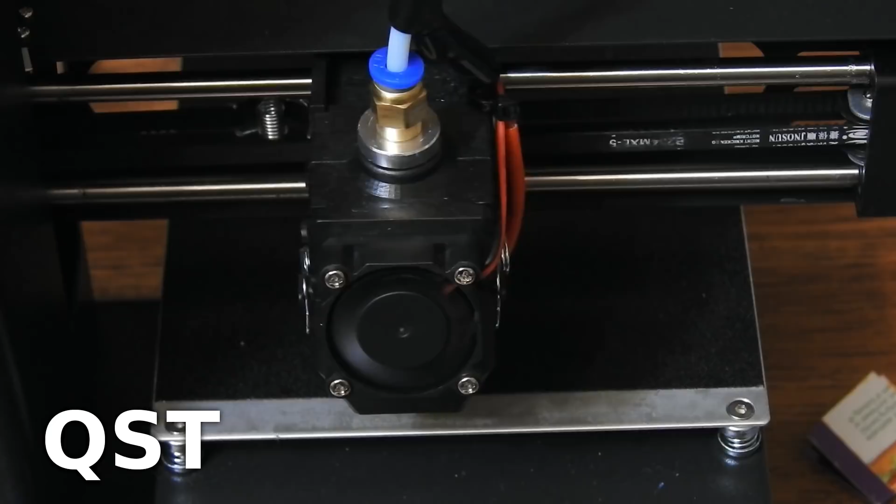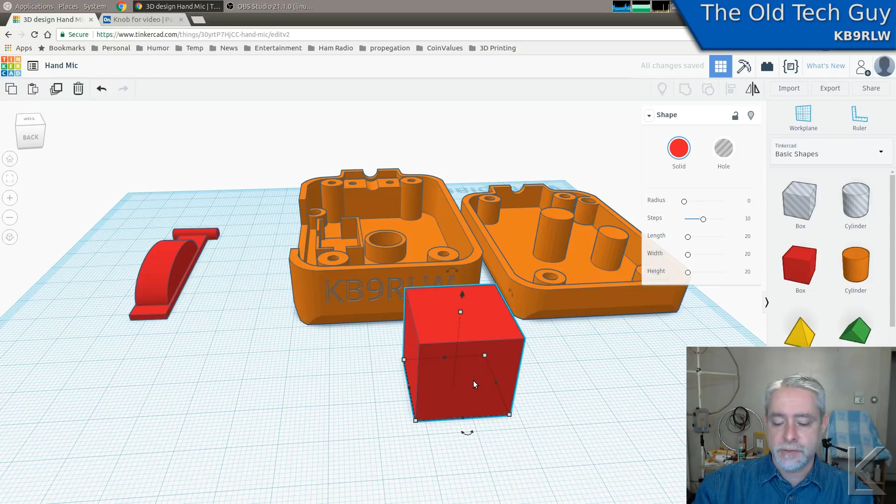Way back in part 2 of my 3D printing for ham radio video, I introduced you to Tinkercad as a design program. Tinkercad is one of the simplest 3D design programs I've ever seen if you're getting into 3D printing. It's primitives based, meaning you can build complex objects, like my hand mic here, out of primitive shapes—cubes, spheres, cylinders, and so on. Very much like Legos, and therefore very easy to use, easy to grasp and understand, and still pretty powerful. As you saw from my hand mic, you can make fairly complicated things with it.

I wanted to move up the ladder into more complicated and more powerful design programs, and make that the next part in the series. Well, that's what we're doing today.

Today we're going to look at a 3D design program called OnShape, at OnShape.com, or CAD.OnShape.com. OnShape is a collaborative computer-aided design program, modern, created to allow people to use it from any web browser, from tablets, cell phones, any device really. It's very powerful—it's getting on par with programs like AutoCAD in that it can make extremely complicated parts.

You can assemble parts together, have them interact with each other. You could, on the screen in your CAD program, model a clamp with a screw and a handle and set up rules so that you turn the screw and it behaves like it would in real life, so you can show assemblies. It's a very, very powerful program, yet still simple enough to be approachable and easy to understand.

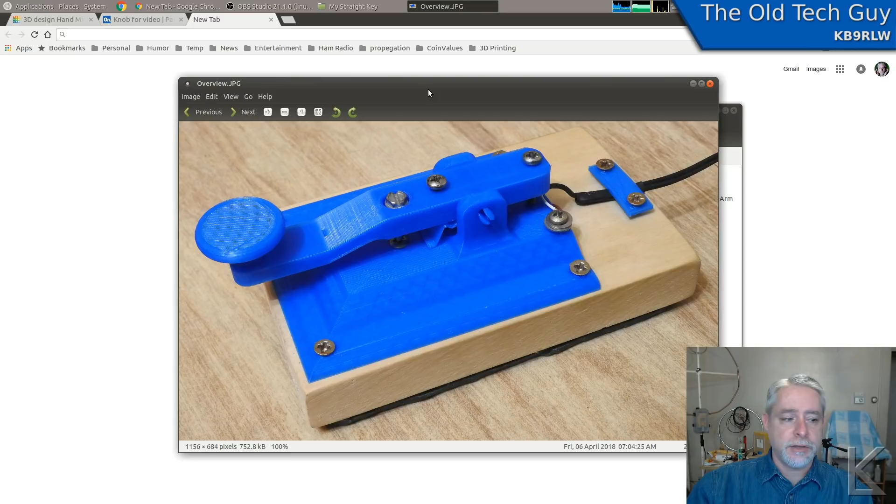For example, I'll show you a picture. Let me switch around here. Let's see—ham radio key parts, my straight key. I just finished this in OnShape, which is a straight key, obviously, designed for minimal hardware.

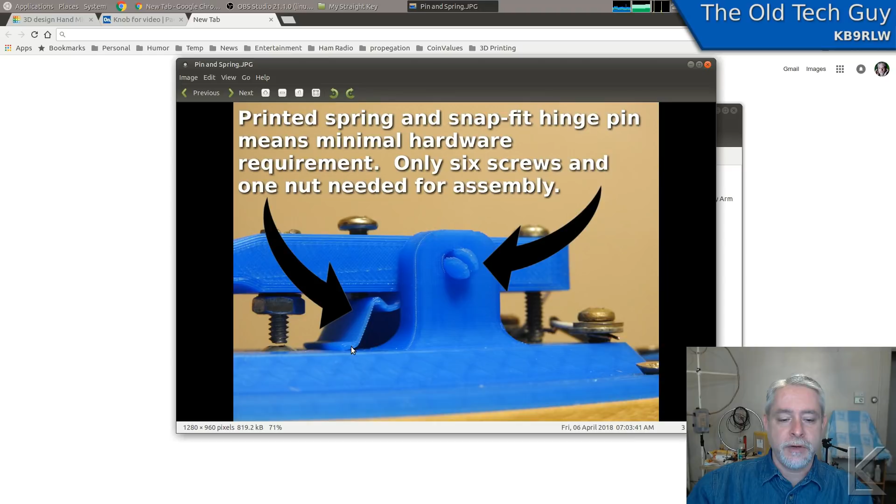I have a 3D printed spring here that's adjustable from a screw up top that'll compress this part of it and increase the tension. Snap fit hinge pin. The knob is also snap fit, and you can see the base has a nice design to it.

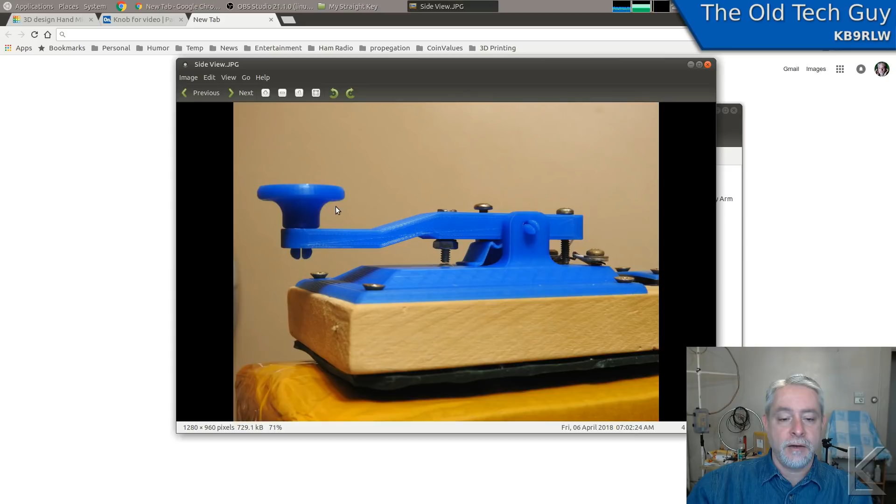We've got nice curved fillets here and curved edges. These are the things that are kind of hard to do in Tinkercad, like this curve on the underside of the knob here—that's hard to do in Tinkercad. It would take a lot of steps and a lot of extra parts.

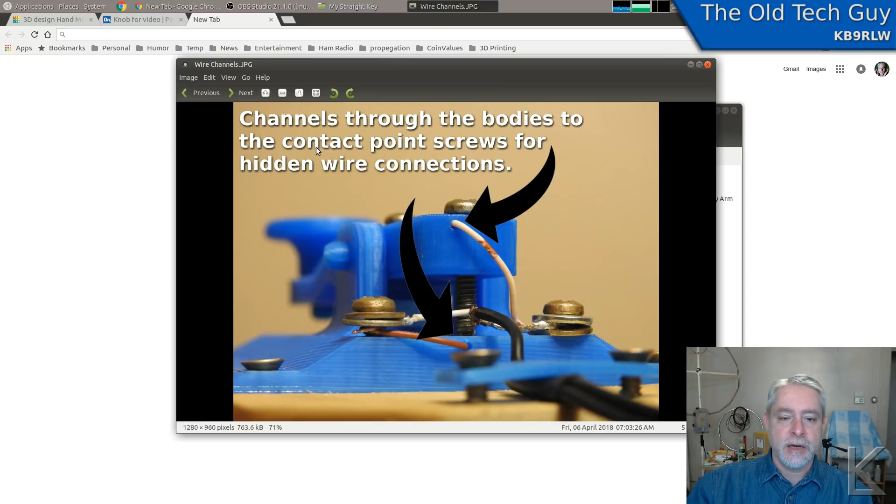I even did a few fancy things, like there's little channels here that the wires travel through the base and through the arm to the contact points, allowing the wires to be hidden when you're looking at the overall straight key. See, those wires are running right through here to this screw and to this screw down here, so it's nice and clean looking on the surface.

So you can do pretty complicated things in OnShape. But as I said, the program itself is a little more complicated to use. So today I'm going to show you OnShape, and we're just going to touch on some of its capabilities. To do so, I'm going to make a simple part—this knob off of a J38 style telegraph key.

Now take a look at this knob, okay? Look at it in profile—you can see sort of the outline shape of it, almost a T shape except for that slope under there. That's important. You could look at this object from the top and you see a circle. You could look at it from the side and you see kind of this T shape to it, right?

The reason that's important is that OnShape is based on sketches. Like most higher-end CAD programs, you create a two-dimensional flat sketch of a shape, and then you expand or extrude it into 3 dimensions, and then you apply operations to it to cut things into it, put holes through it, extend parts out of it, smooth it, twist it, loft it, do all kinds of things. So you always start with a two-dimensional sketch, like you would on paper, right?

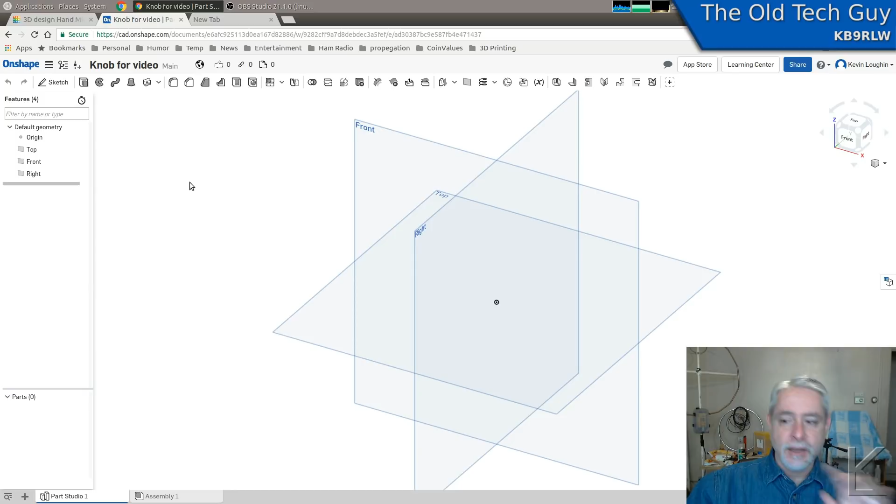So let's go back into the program here. This is the main user interface to OnShape. By default, you have 3 planes defined here. You can see these—there's a front plane, there's a right plane or side plane, and then there's a top plane when you're looking down from the top. So the 3 dimensions are represented, and you start your design by drawing a sketch on one of those dimensions.

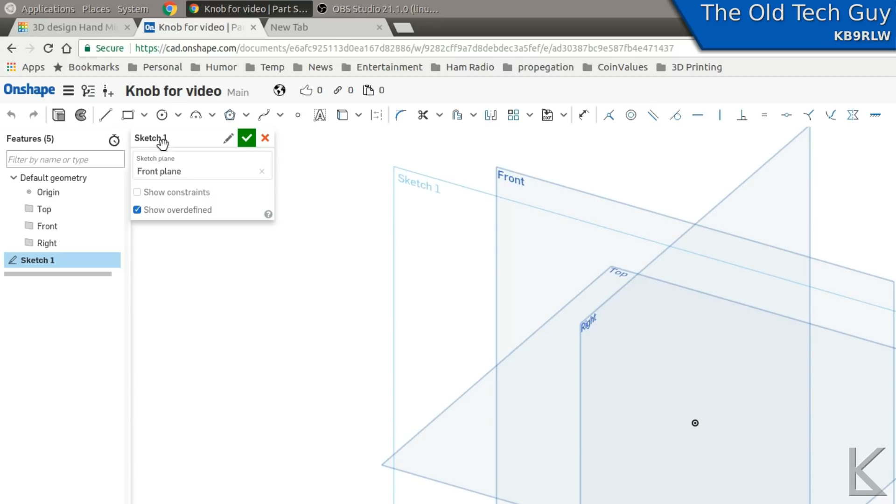So I'm going to draw an outline of that knob on the front plane. I'll select the front plane, and I'll go up here to Sketch in the upper left, and it creates a new sketch. Now you see this little window that popped up here—every tool that you select will have a little window that shows you the options for that tool. So I've just created a new sketch on the front plane, it says right here, front plane.

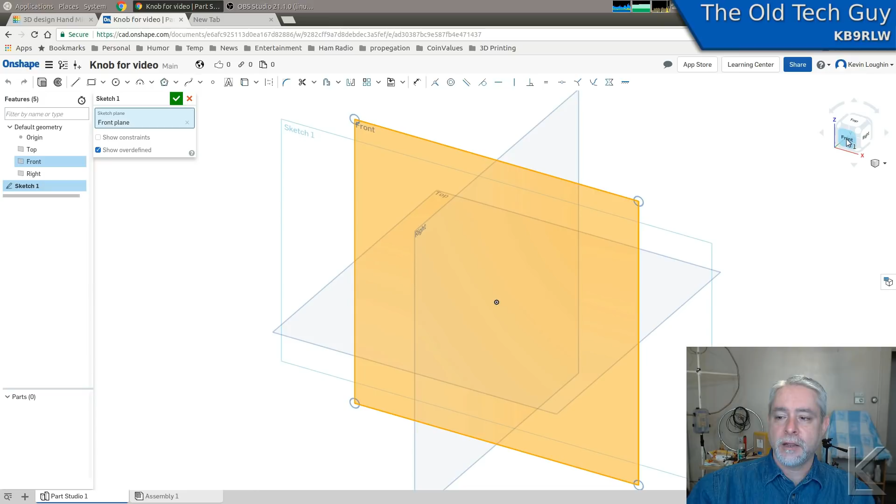And we're ready to start drawing on this plane. I can come over here. This little cube shows you your views, and I can click on front, and it'll switch to a front view looking right down at the front plane. I'll use the mouse wheel to zoom in, and the mouse button to position my display. If I use the right mouse button, that would rotate, but I don't want to rotate right now. I'm sitting on the front plane where I want to be, so I'm ready to start drawing the profile of my knob.

Now, this knob is symmetrical, right? It's the same on this side as it is on this side. We've got perfect symmetry there.

So a real neat shortcut for drawing this knob: I could draw the shape completely, the T, except that all I could do with that is extrude it out in 3 dimensions, and I would have square faces, right? It'd be like a block knob, like a Minecraft knob, instead of this nice round shape. Well, it's a round shape.

So what I'm going to do is draw half of the profile only. And then I'm going to take that half and rotate it around the center to make the solid shape. So I'm going to draw the profile of my knob.

We're going to do that with the line tool up here in the upper left. I'll select a line, and I'm going to start from this center, because that makes it easier to line things up. This center dot here lights up when I cross the center line, and you see a little vertical line next to my pointer. That's telling me I am on the center of that line. OnShape knows when you want to do things like in the center of a shape, and it'll light things up and snap to the center of things.

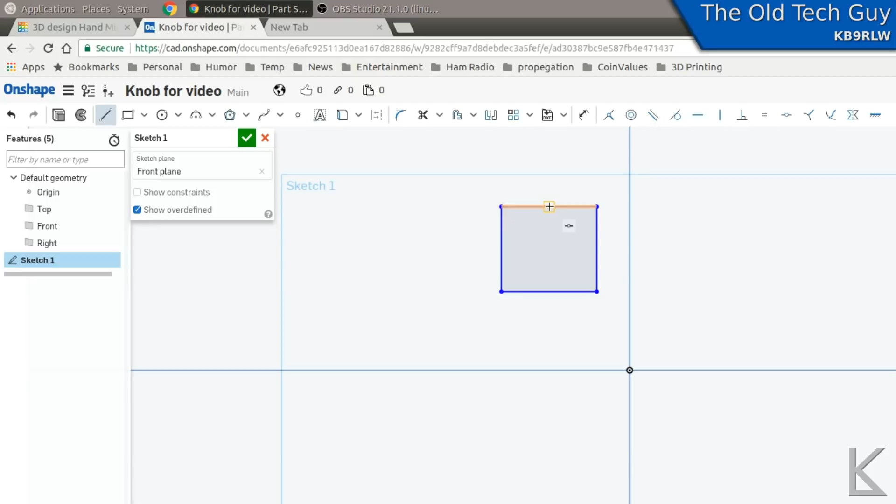That's very handy. For example, we'll do something like a rectangle or square here. If I wanted to draw a line down the center of that square with the line tool, I could guess at it, but as I move the pointer right to the center, a little box appears around it and a little constraint dot icon, a line with a dot in the middle, indicating that I am on the center of that line. OnShape knows that I probably want to work from the center of that point and automatically highlighted it to tell me I was on the center of that object. So that's a very handy thing.

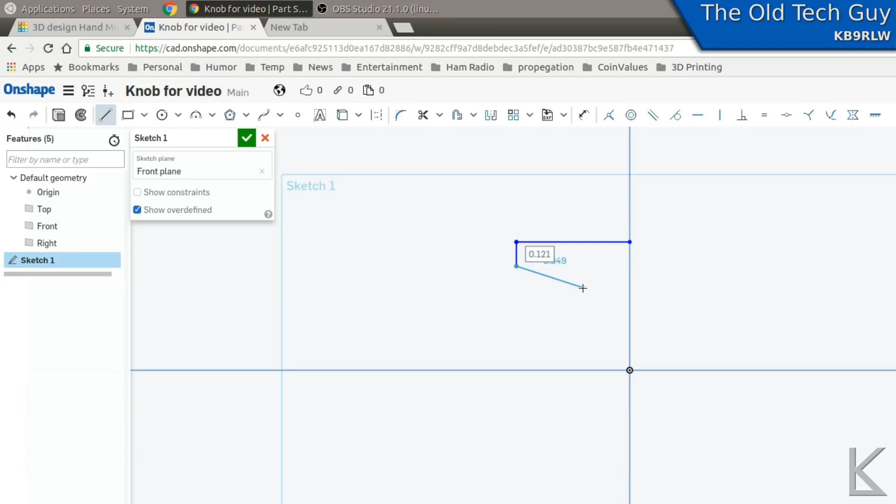Okay, let me get rid of this entity here. All right, so for our knob, I'm going to draw half of the profile of the knob, and it's a rough shape. It's about like so, like so, like so, like that, and back to here. Okay, so that is the profile.

Now I need to connect it. I need to close it up. So I'm going to draw one more line vertically up to this dot. Boom. Okay, now we've drawn roughly the outline of our knob.

Now I'm going to refine that a little bit. We're going to add some dimensions to it. Now I know that this knob is 29 millimeters across the top.

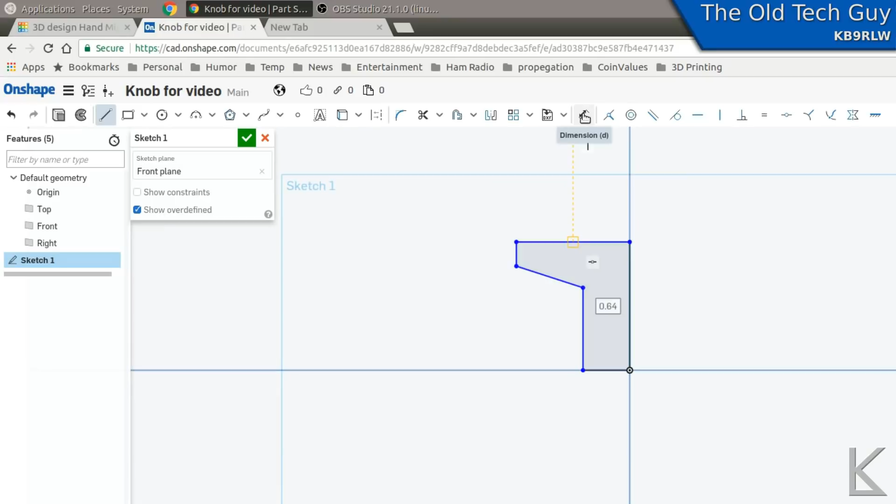So I want this line here to be half of that. I'm going to come up here, there's tools across the top, and the tool I'm interested in is this one, with two little arrows pointing between lines. When you hover over things it tells you what they are—this is the dimension tool. If I wait, it gives me a description of what that tool does and how to use it: select the entity to dimension, or entities to dimension between, then specify the value, and use enter to apply the value.

So I'll select the tool, I'll select this top line, and there's my dimension. Then I can type in what I want it to be. What did I say? Okay, 29 is the total, so half of that is 14.5, right?

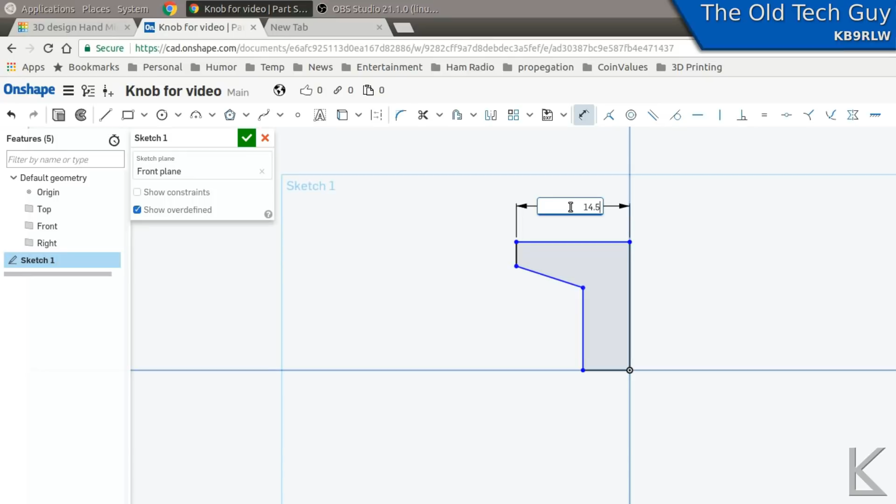Now I've got to zoom out. Oh, you know what, that's working in inches. I want to work in millimeters. OnShape is an American company, so they default to inches, which annoys me. I wish I could just set my default to be millimeters.

All right, workspace units, up under this menu with the 3 lines. Workspace units, and set default units to millimeters. Okay.

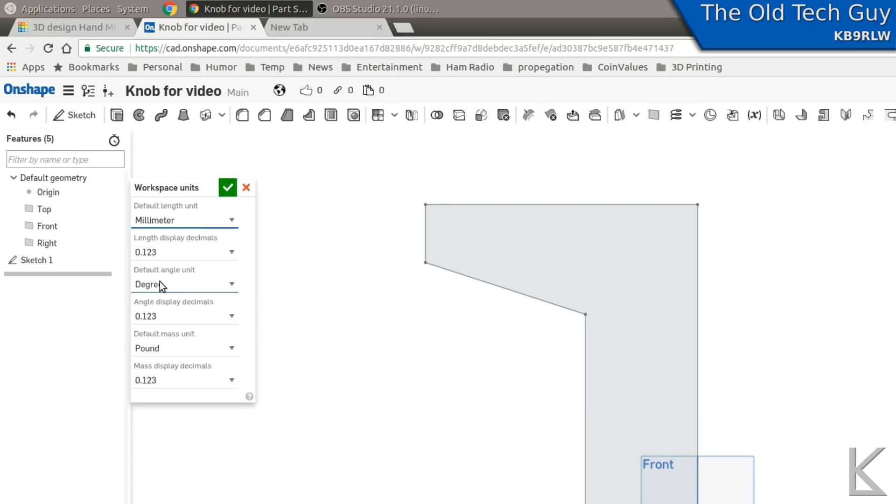Now, if I select that line... oh, I've got to go back into my sketch. I exited out of my sketch.

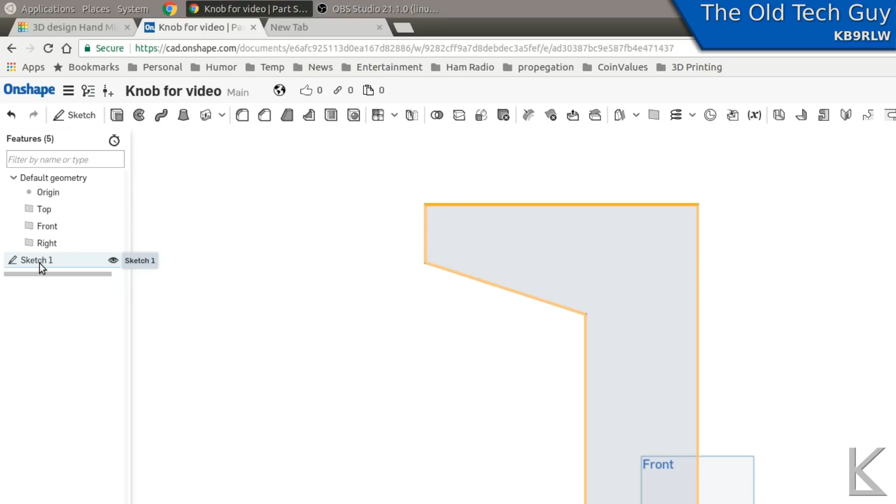While we're here, let's talk about this. Over here on the left is your features list. It shows all of the entities in your drawing. So my sketch shows up here as Sketch 1, I didn't name it yet. If I double click that, I go back into sketch mode. It shows here in this little box that I'm editing my sketch. And here's my sketch with its dimension.

368.3 millimeters. No, we want that to be 14.5 millimeters. Boom, that's more reasonable. Let's zoom back in.

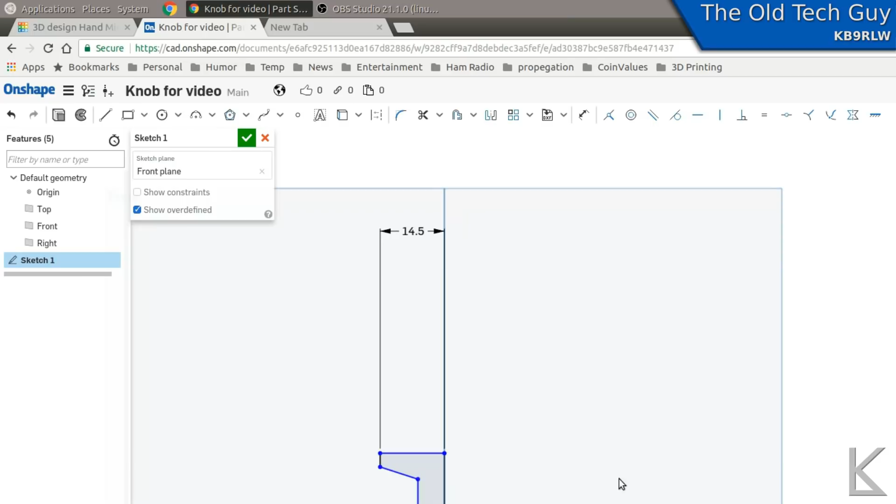Put that dimension down here closer so we can see it. Okay, now what's the next dimension on our knob?

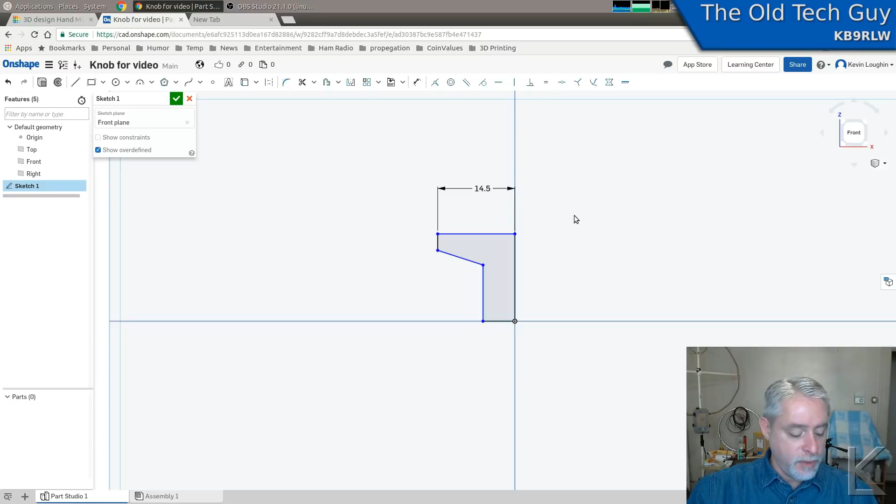Well, how thick is it at the top here? So I get my calipers out, and I'm going to measure that at the edge, and it is 2.5 millimeters thick. So I'll take the dimension tool, I'll pick this line, and we'll set it to be 2.5 millimeters.

Okay, now the tricky part. We've got a slope that slopes down about halfway down, and the bottom of the knob from the bottom of that slope is 8 millimeters. So I guess the easy thing to do would be to dimension this line here at 8.

And that slope adjusted itself. And now the bottom of the knob, I've already measured it, is a total of 13 millimeters. So I want to dimension this line at half of that, which would be 6.5.

And there is the dimensions of our knob. Now, in CAD, you're supposed to fully constrain sketches, which means you're supposed to lock down all the dimensions so that it can't be manipulated any further.

Lines that are already locked in have turned black. Like this line here, I can't change the length of this line without affecting some other aspect of the sketch that I've already defined. So it is locked at 8 millimeters, and this is locked at 2.5.

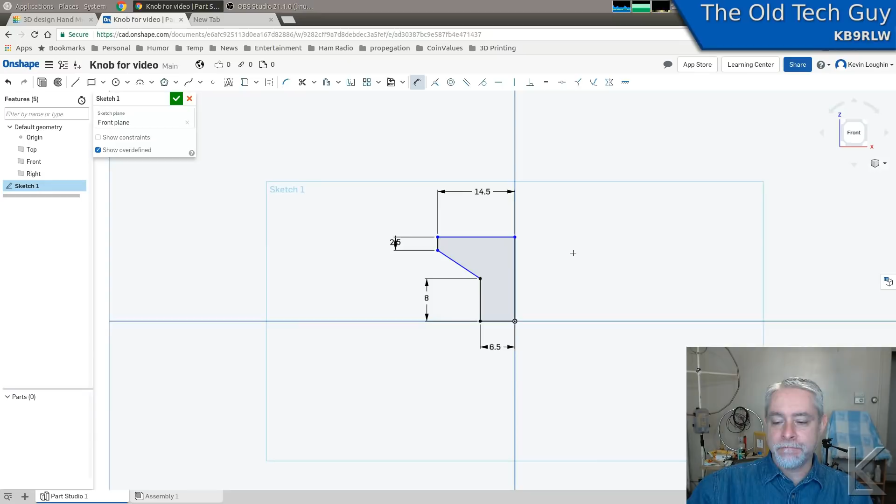So that would be 8 plus whatever this is, plus 2.5. The measurement tool - if I select, let me turn off dimensions.

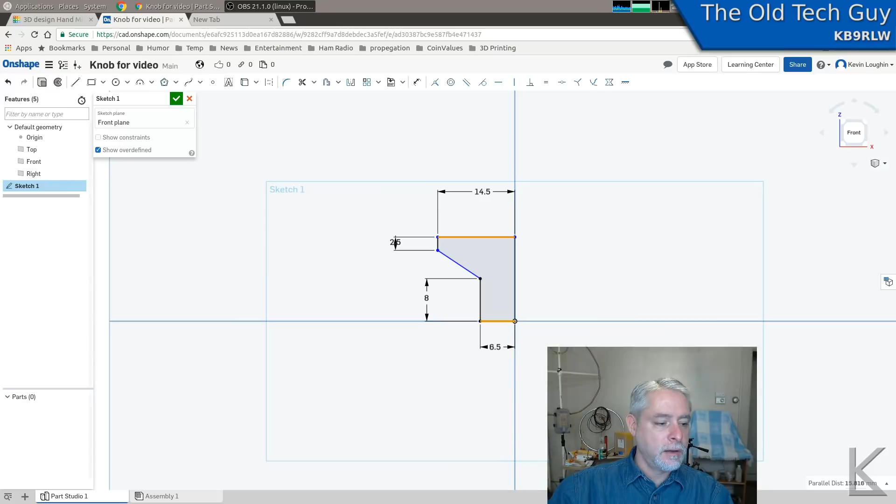If I select 2 entities in my sketch, like this line and this line - down here under my video, let me move myself out of the way. Can I move myself out of the way? There.

Right down here, there is a little bit of text that says parallel distance 15.816 millimeters. That's telling me the distance between these two lines that I selected. So that's an automatic measurement tool, it's always there.

15.816. So if I come back into my drawing here, dimension this line, 15.8133, okay, that's fine. 15.816, there, okay, now that's locked in.

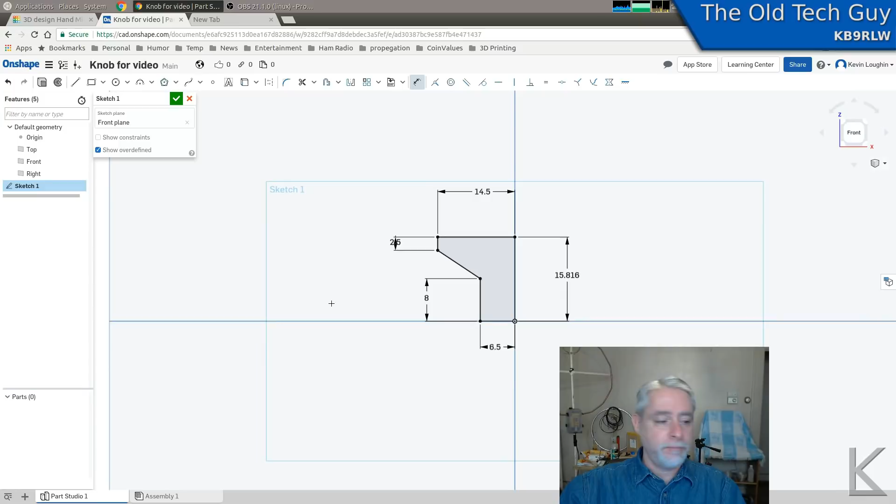All right, let me put my video back. All right, so now our lines in our sketch have all turned black. It's fully constrained, nothing can be changed anymore. That's what we wanted to see, so I'm done with this sketch.

I've sketched the profile of half my knob. I'll go up here to the checkbox and check the green checkbox to tell it, okay, I'm done with that.

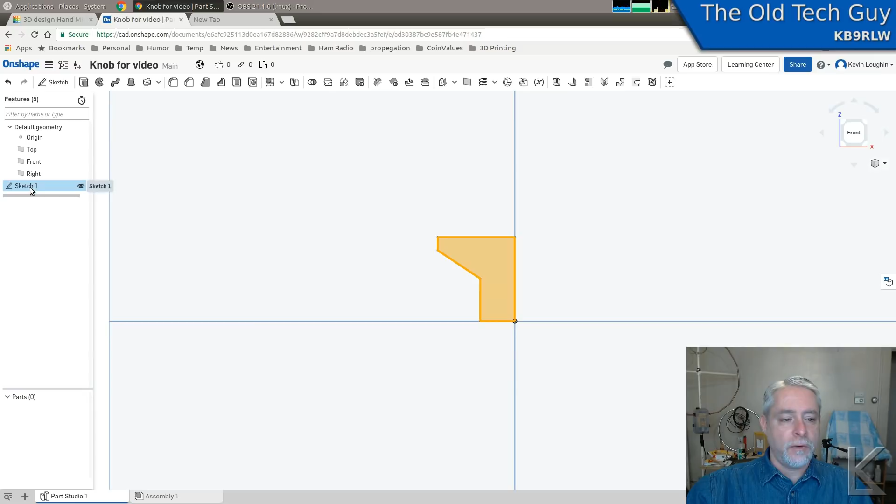Now I'm going to take this sketch, this two-dimensional object, and come up here - at the top there is a tool called Revolve. The description says it creates, adds to, or subtracts from parts by revolving a sketch, meaning rotating it around. I'm going to choose that.

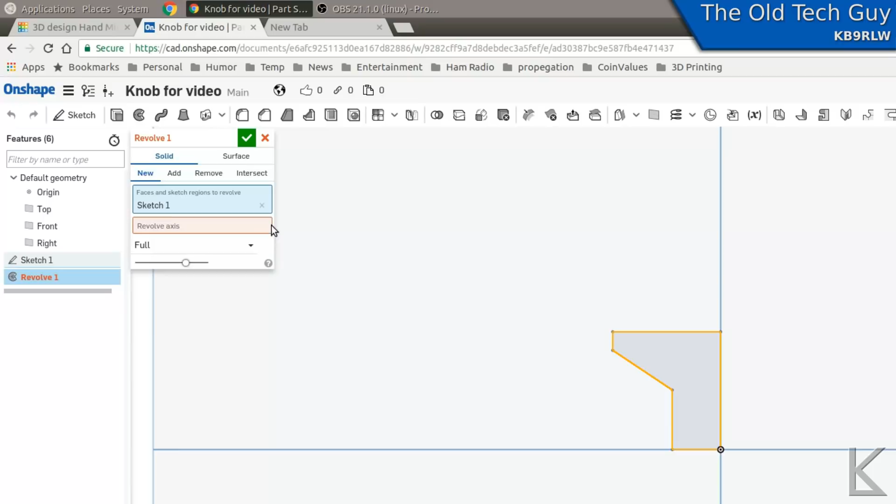It's already chosen Sketch 1 as the sketch that I want to revolve because I had that selected over here. Here it wants to know the revolve axis - what am I going to revolve it around? Well, I'm going to come over here and choose this line. And then how far to revolve it? Full is full 360 degrees. Hey, that's what we want, right? So that is our revolve.

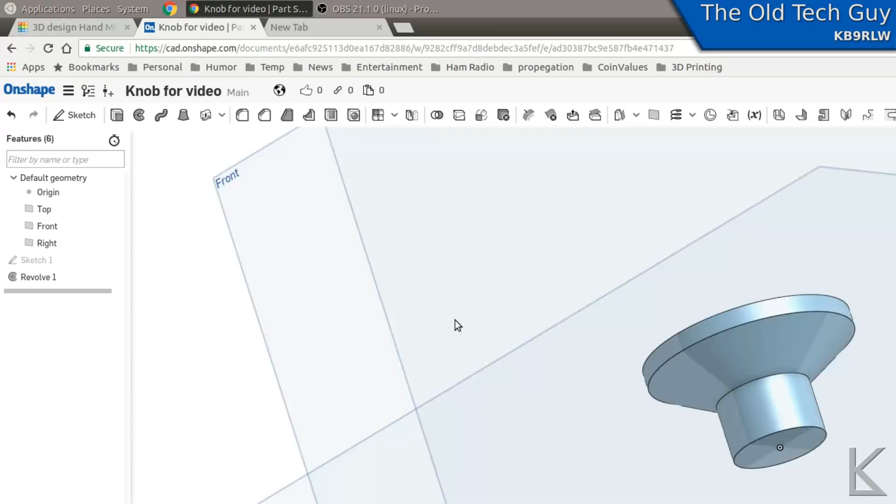And if I hit the checkbox, you can see we now have the basic shape of the knob. Isn't that cool?

What else do we need to do? We need to, before we clean it up, put a hole in the bottom of it to be able to screw something into it. This knob here has a threaded insert already in it, right there. But I don't want to get into creating a thread or whatever. I'm just going to put a hole in the bottom of this knob that I could then put a screw into.

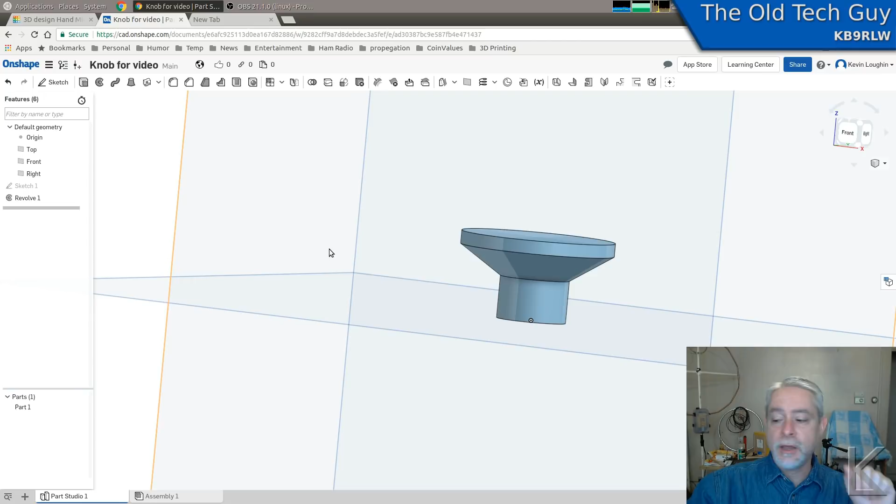So that brings me around to showing you another feature in here. To create that hole, I'm going to want to put it on this surface, on the bottom of the knob. So I'll select that surface to highlight it, and come up here to the upper left and select Sketch. What I'm going to do is create another sketch on that surface of the knob. It shows here sketch plane, face of Revolve 1, which is this face.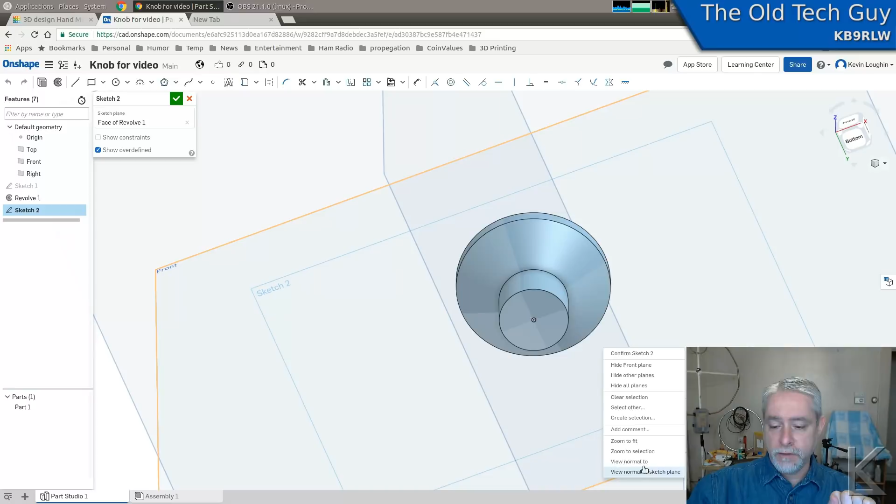Now I can go up here and switch to the bottom view to flatten that out to look at it. I can right click on the screen, and 'view normal to' will do the same sort of thing. No, it didn't.

Should have. I'm going to select the face and do it there. View normal to. Yeah, there we go. All right, now I'm looking straight at the bottom of the knob. Okay, and I'm creating a sketch on here, right? I'm going to come up here and use the circle, center point circle tool. And when I choose that, I come down here to where my sketch is.

Now, as I move my pointer around and get across that center point, it's going to have a little box up here around it. And that's telling me if I click here, I'm going to be locking the center of that circle to that center point, which is exactly what I want because it's central to this face. So I'll click and I'll drag out to create a circle. And there we go. Now I just need to assign it a dimension.

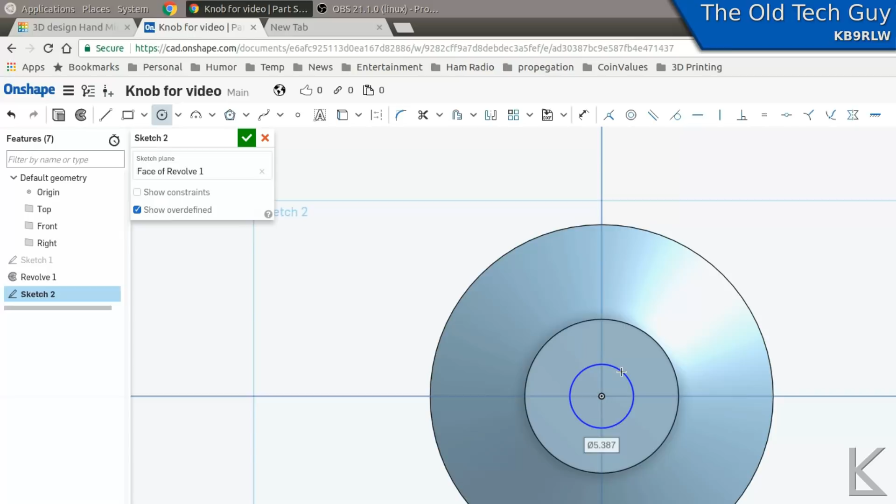We turn off the circle tool, double click on that dimension. And I know from experience that if I want to thread a fairly common screw type, like you use to mount hard drives, here in the US they're 6/32, 6/32 is the thread pitch and length. I want to make a 3.4 millimeter hole. Now, I really want a 3 millimeter hole, but when you're 3D printing, the bead that your 3D printer is laying down is 0.4 millimeters wide.

So if I want to make a 3 millimeter hole, I have to account for that half of that bead that's going to overlap the inside of that hole on either side, right? Which would be 0.2 and 0.2, so 0.4. By making that hole 0.4 millimeters bigger, I'm accounting for that little bit of overlap caused by the bead of material my 3D printer is laying down, and I'll end up with a 3 millimeter hole. So I'll set that at 3.4.

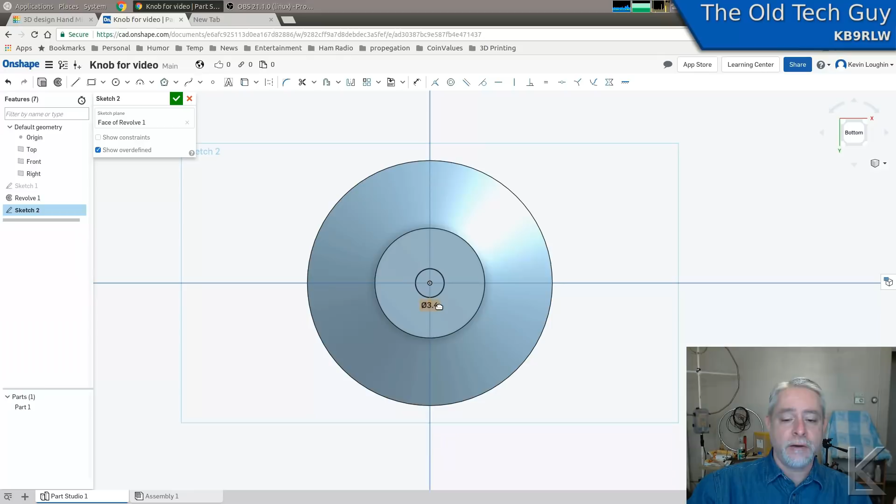I've created my sketch on this surface. It's all black, meaning it's fully constrained. It's locked to the center. It has a dimension. That's what we want to see. So I'll come up here and check the green box on sketch 2. In fact, I'll name this one too, just to keep it straight. Hole. And check the green box. And now you can see over here in my list, hole has appeared.

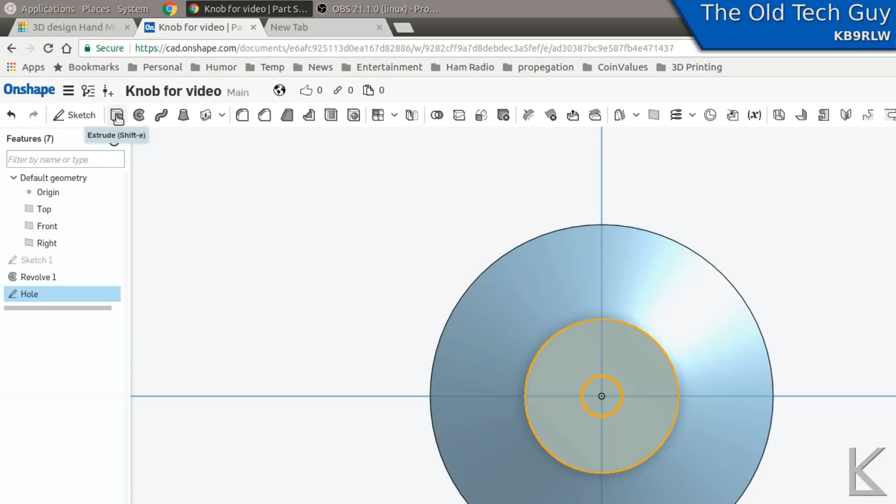And if I choose that and go up here and hit the extrude tool, see by default, it's adding material, so it's extruding outwards. Nope, I want it to be a hole, so I'm going to click remove. And OnShape is going to be smart enough to figure out I probably want to do a hole into the object, and it's going to arbitrarily choose some depth here. But I can choose that right here.

I could make the hole go through all by selecting it on this list, and it would go all the way to the top of the knob. Up to another part, up to another face. If you were working with a multi-dimensional part, you had all kinds of different faces, and you were making a hole just through part of it, you might choose up to the next face just to get through that little part. Blind simply means I'm making a hole, and I'm going to choose how deep I want it to be, and I'll make it 7 millimeters deep.

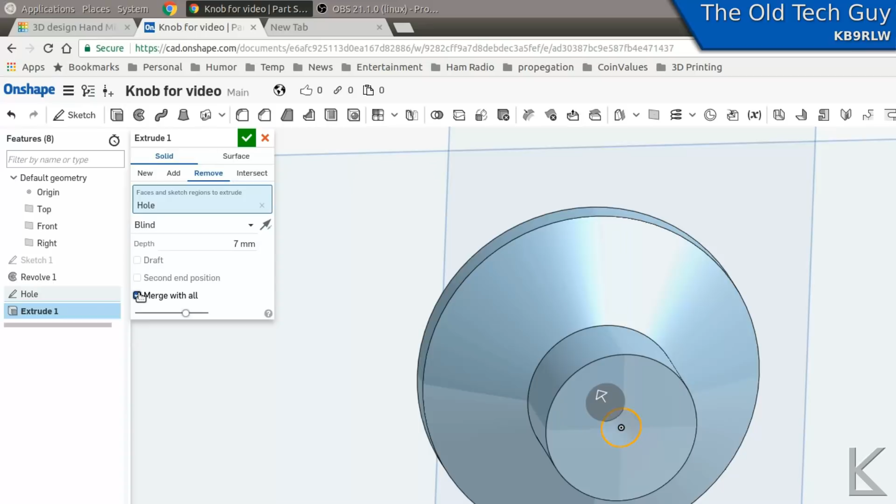Merge with all is important because that's going to merge this extrusion into this part. So we always check that. I'm still learning OnShape myself. A lot of details I'm missing, but there we go. Now you can see our knob has a 7 millimeter hole right in the bottom that we can screw a screw into. Okay, time to clean it up.

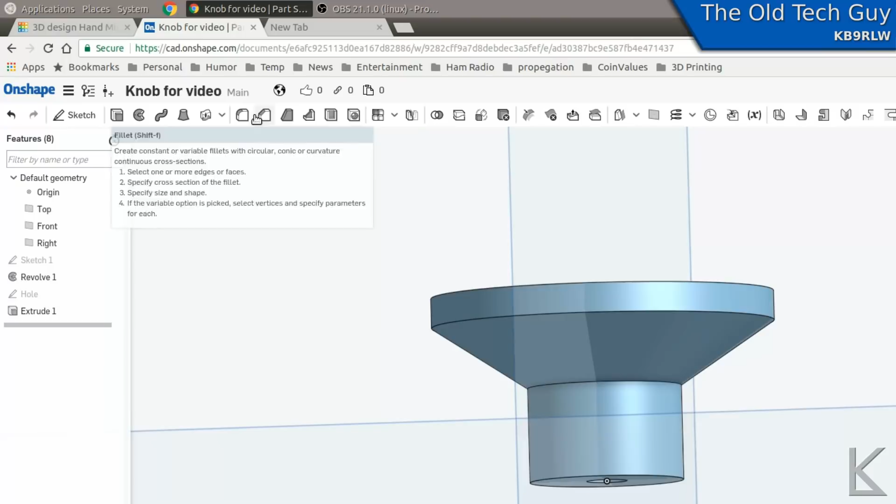Now this is what I really like about OnShape, where it excels over Tinkercad for making clean and pretty parts. Up here in the tools, you have fillet and chamfer. Now a chamfer is simply an angular cut across the corner. A fillet is a nice curved rounding of an edge. I'm going to choose the fillet tool. And it brings up a box, right? The first highlighted thing is entities to fillet, all right?

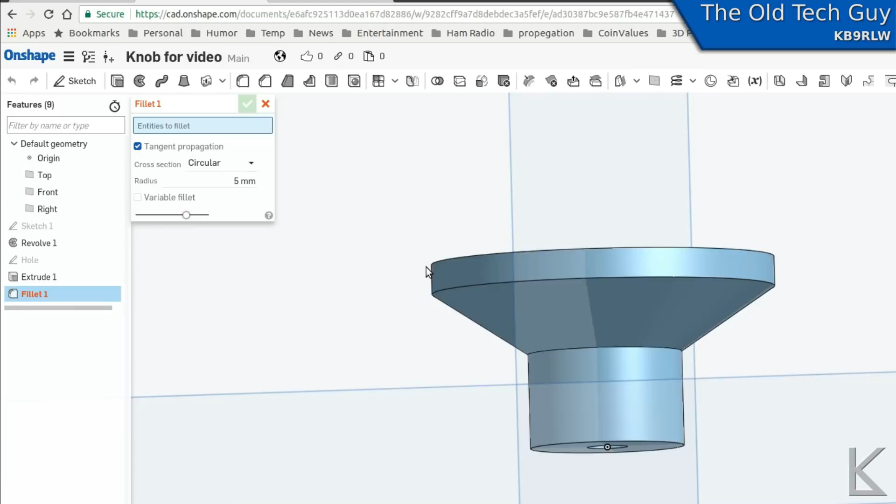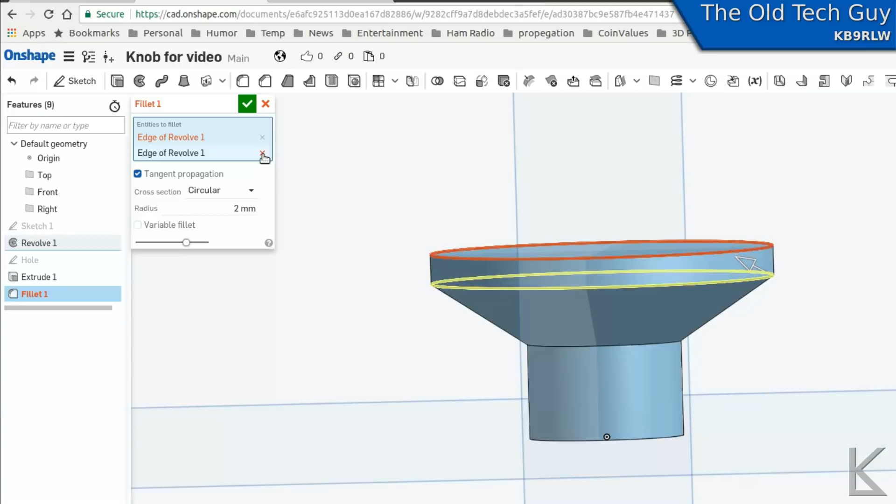So I want to fillet this top circle of the knob and this one, and it defaulted to 5 millimeters radius, which is just too big. I'll make that 2. Let's see how it looks. Oh, it doesn't like this one. Let me uncheck that one. We'll just look at the top. Okay, there's our top at 2 millimeters, and that's nicely rounded.

I'm going to make a second fillet for this one and lower that value quite a bit. So I'll choose fillet again. We'll choose that ring and go with a very low value. Okay, it took 1.

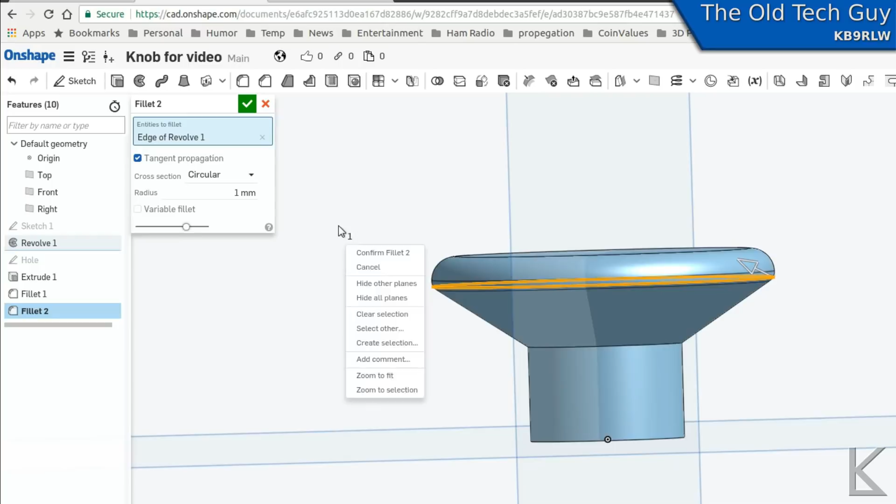Let's see how that looks. Yeah, that's a nice smooth transition. Where did I go a little higher? 1.5. There we go. I like that. See how nicely rounded that looks? Look at that.

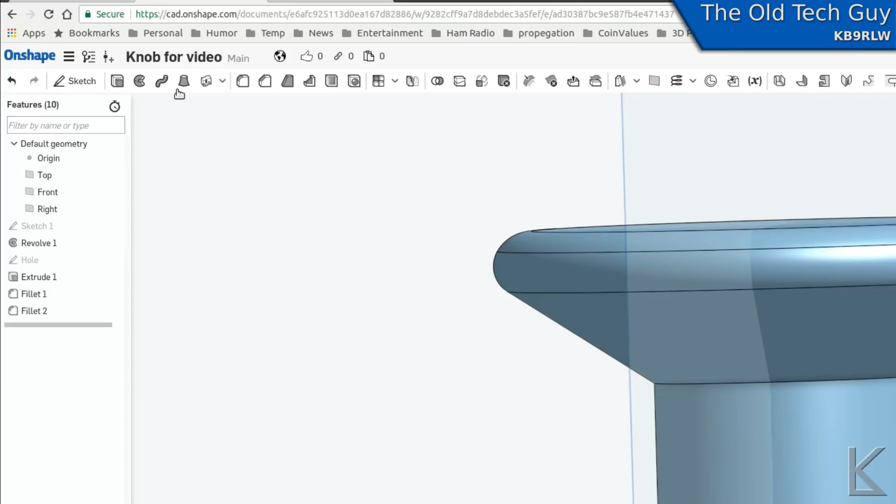And now I want to fillet this ring here to smooth that transition. So I'll hit fillet. I'll pick this ring. And as you can see, OnShape automatically figured out that this is an inward facing cut, so it went to an inward facing round. And there's an arrow here, and I can just drag this out to get the visual appearance I want. Like, that looks really nice. Let's do it about there. Boom. Look at that.

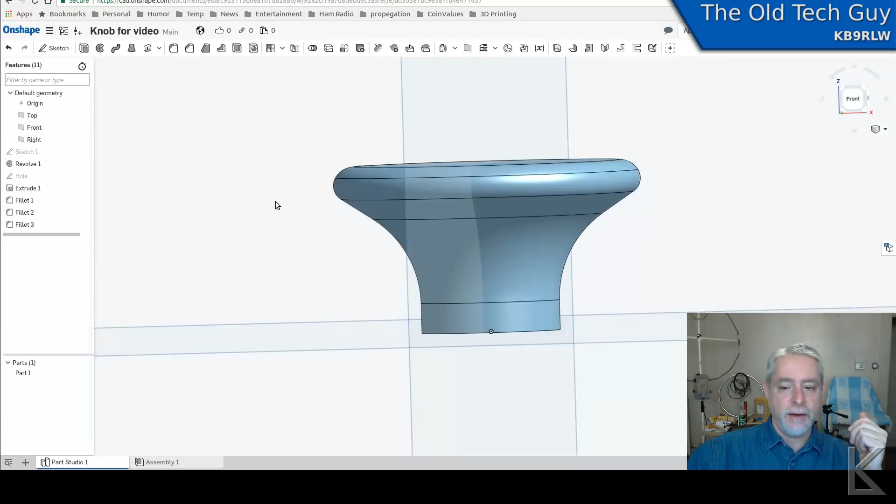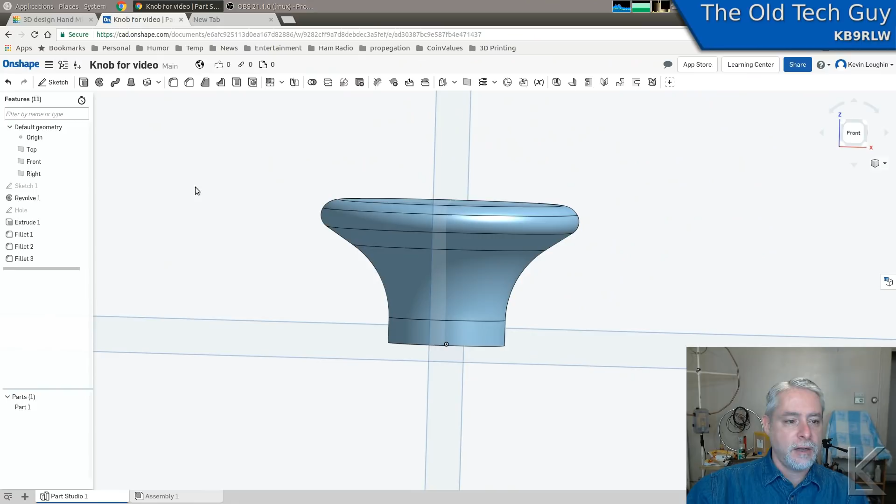And there is our knob. The only thing left to do would be to print it and then mount it on the key. So you can see OnShape lets you create much nicer looking parts. And you can get really complicated with it. I've created a straight key. Here, let me close this document and I'll go and show you one of the other things I created. Here's my Morse key that I just finished up.

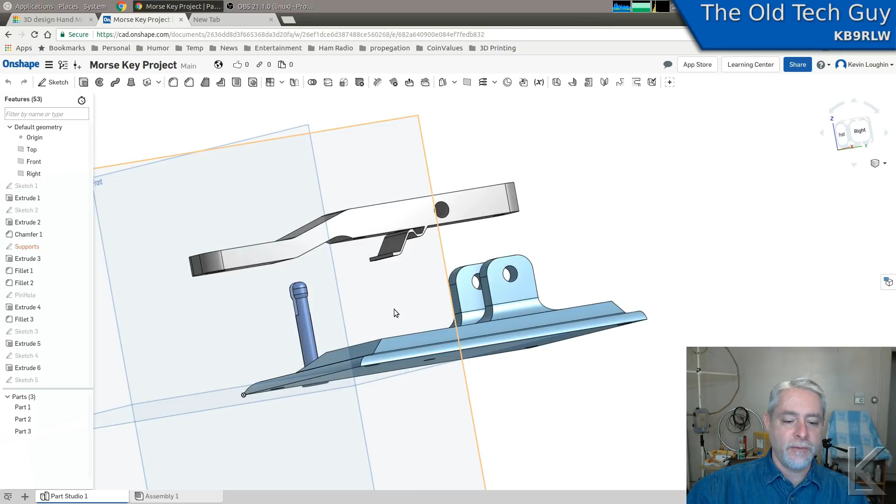And it consists of several parts. You can see I've got the base, I've got the arm up there. This is actually a spring that sits on the bottom of the key that is 3D printed right along with the key. I made this snap fit hinge pin that goes through there and snaps in place. You can't really see them through the models, but on the back you see this little hole here and this little hole here.

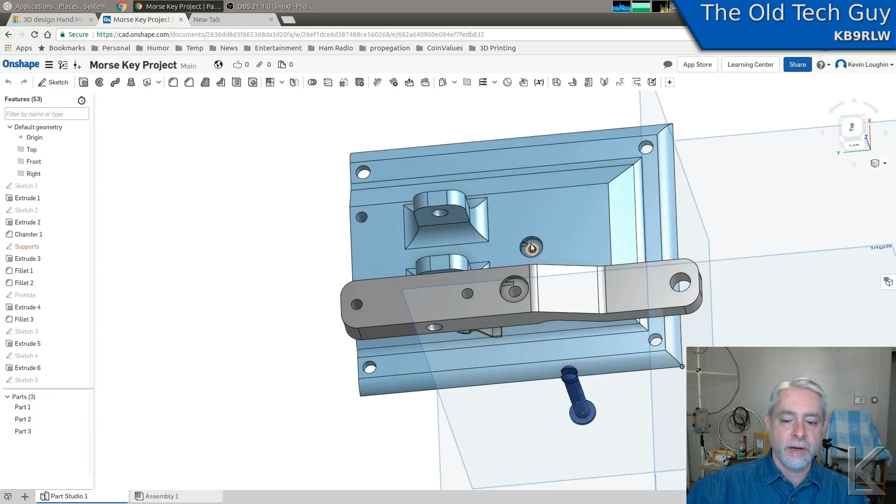Those are channels that go all the way through into the pockets where the screws are. So you can run a wire right through the body of the key, right up here to make contact with the screw, and it makes for a cleaner looking appearance. And of course I've used fillets here around the base of the support to give them a little more strength and a little nicer look.

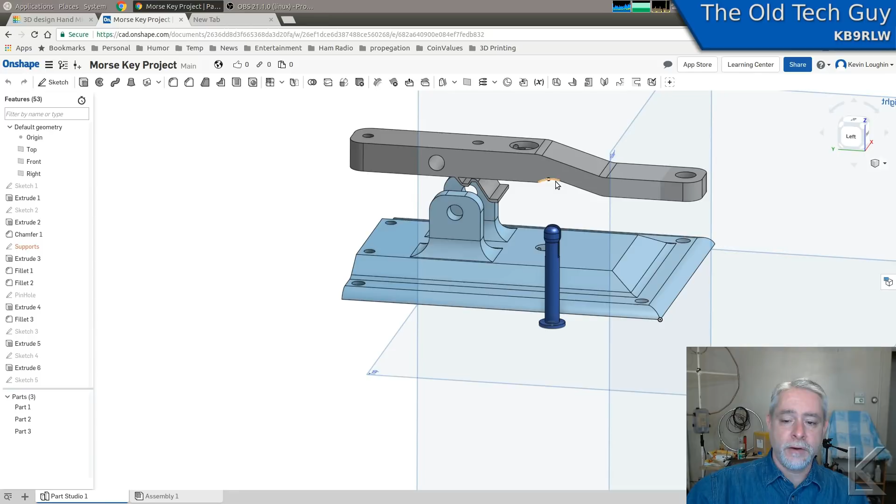I filleted this bottom edge of the key base here. I used fillets to round the edges of the arm here and there, underneath and on the back. So OnShape let me create some very nice, clean looking features with this thing. Oh, come on, straighten up, there we go.

And you can get even more complex than that. You can get very complex with this thing. You can create complex geared assemblies and things. It has tons and tons of power. I'm only scratching the surface here. But it's free. It runs on all platforms, all devices. You can collaborate with it. You can share a design with somebody else that's on OnShape and work together on a part.

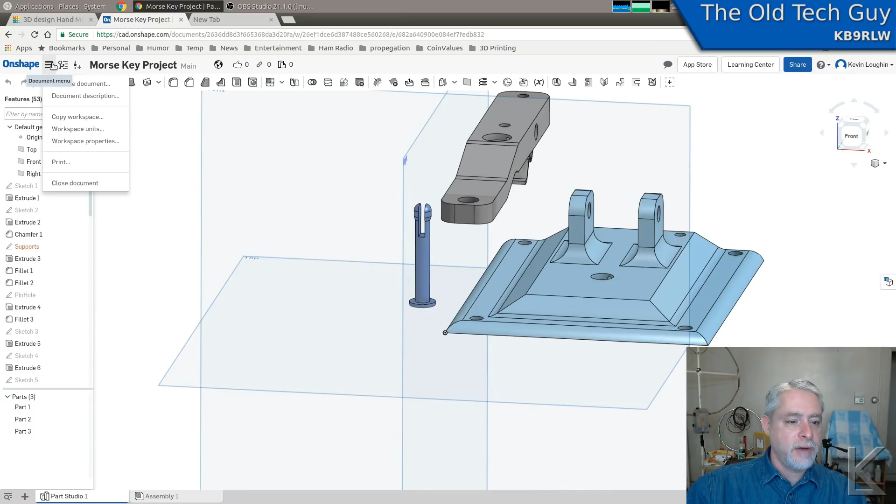It's really quite powerful. Yet it's easy enough to start to figure out that you can get into it and move forward. As I showed you here, you start with simple sketches, simple tools to extrude them or whatever. Oh, and when you're ready to export your part out for printing, let's go back to the knob we just created. All right, so here's our knob that we just made.

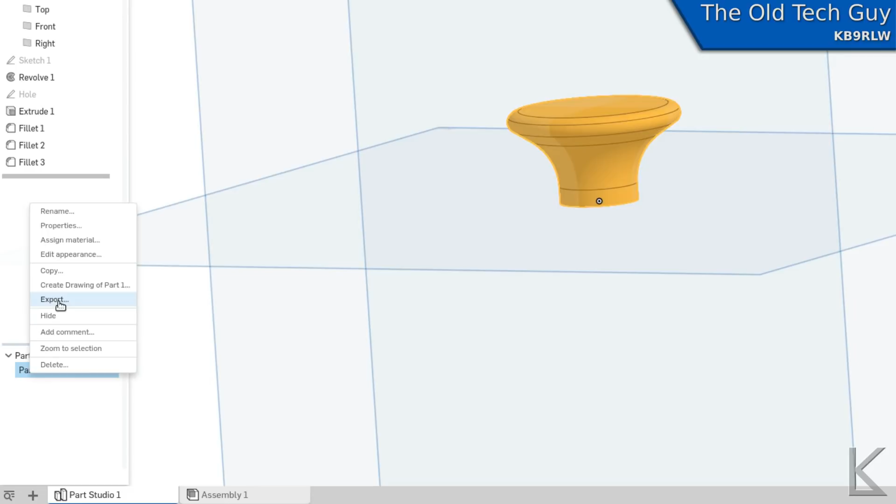If I wanted to export this for printing on the 3D printer, down here in the lower left is our parts list. And I click on that to highlight it. You can see it light up. If I right click on that part, one of the options here is export. I'll select export and we get a window where we can name it. We can choose the file type, units of measure.

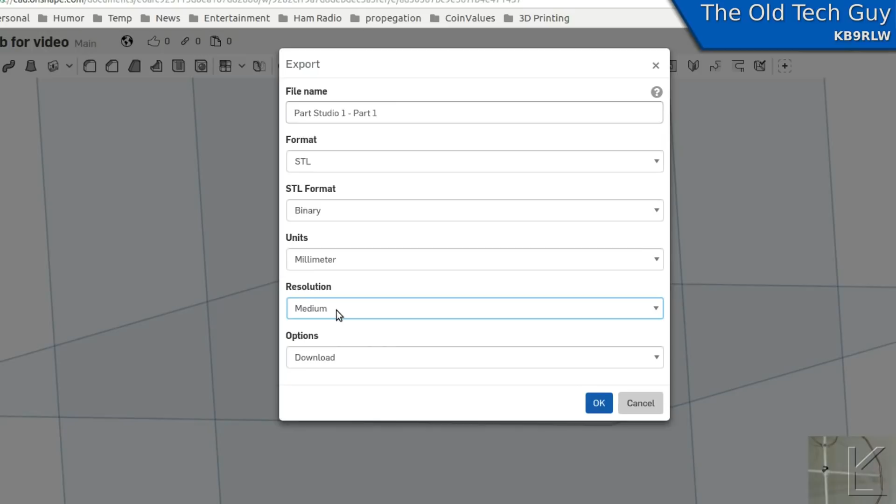Resolution is how many facets it has. If I put this in low resolution, where there's curved surfaces, you might actually see that they're made up of flat sides, little bitty flat sides. And then, of course, high resolution has even more curves and more smoothness. I found that medium is fine. If you had a really small part with lots of fine detail and curves, like a model of a face, you might want to go to resolution fine to get those extra details.

But here you just type in your part name, knob for video, and it has exported the file. I'm ready to slice it and send it to my printer. So there you go. That is OnShape.

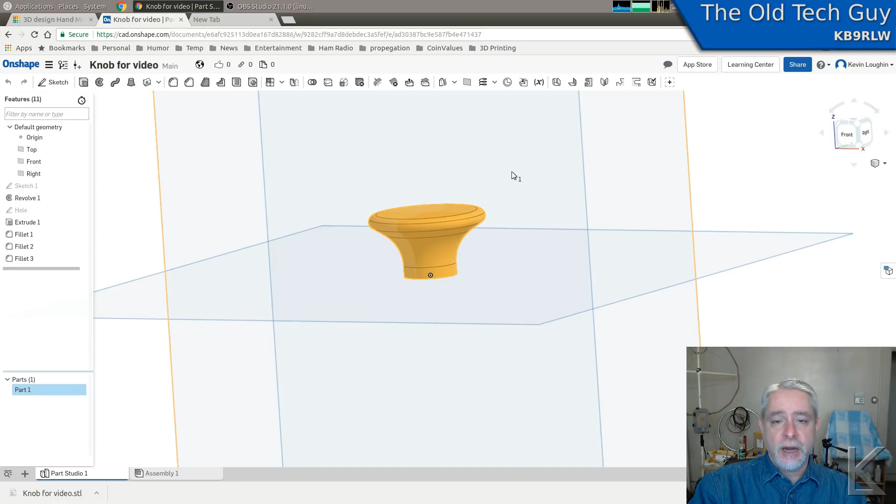Check it out. If you're getting into 3D printing and you're really beginning to enjoy it, this is the next level in design. There are standalone programs for Windows like Fusion 360 and others that I'm not going to cover because I'm concentrating on tools that can be used by anybody on any platform, Linux, Mac, Windows, or whatever. And this is definitely one of those tools. Runs in a web browser, runs on a tablet, it'll even run on your phone. Although, boy, you'd have to be dedicated to do that.